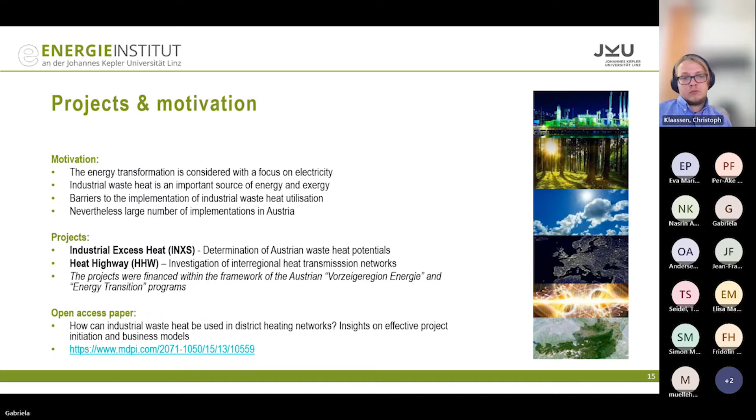So in order to determine the success factors and the business models of industrial waste heat cooperations, we conducted an Austrian-wide survey. In previous research, my colleagues, Moser and Lassacher, searched for already implemented waste heat cooperations and found 45 best practice examples that could later on even be extended to 51. In this figure, you can see the map of Austria in dark gray, and the little black triangles represent already implemented waste heat cooperations. And we can also see that they are especially located in industry-dense areas.

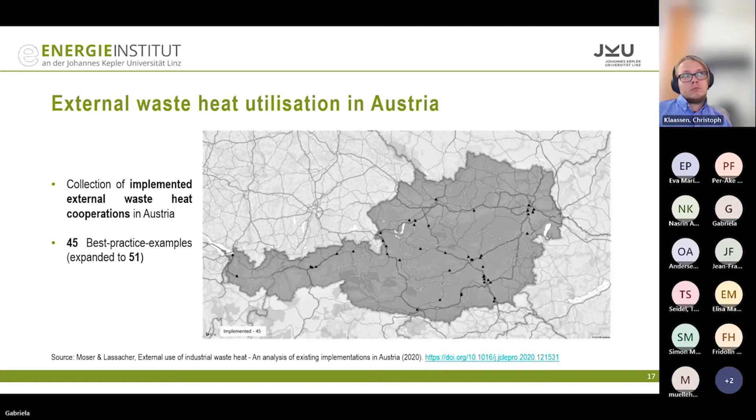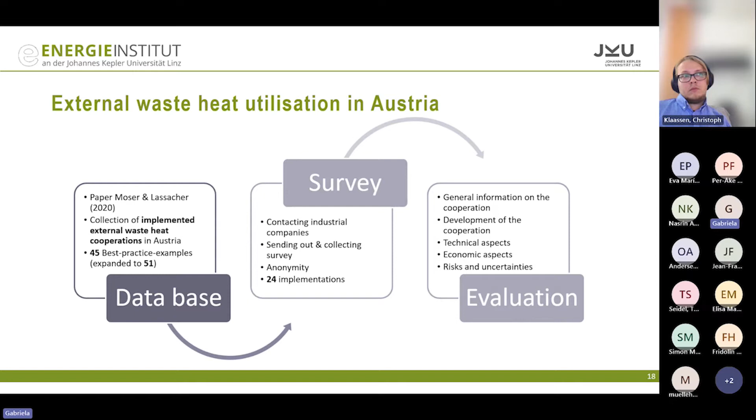Moving on to the survey, we contacted the industrial waste heat providers that were identified in previous research, sent out the survey via mail in the form of a text document, and collected it roughly a month after. We reassured the participants that only the name of the responding company will be published and that further data remains anonymous. In total, we received 24 responses. Then in the next step, we analyzed the survey results on the general information regarding the cooperation, how the cooperation came about, the technical and economic aspects, as well as risks and uncertainties.

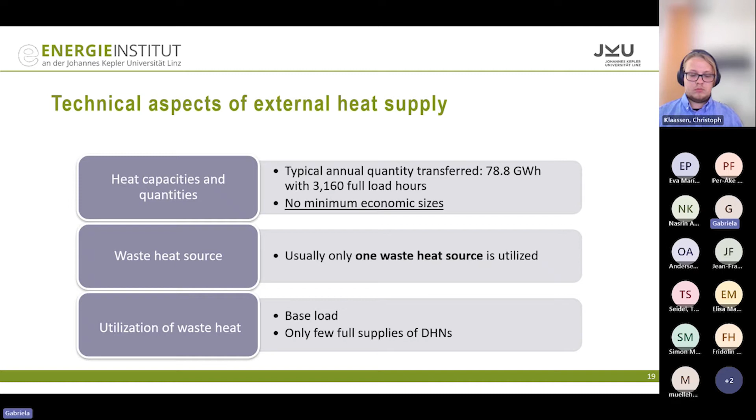So let's have a look at the technical aspects. We found that the typical annual quantity transferred was around 80 gigawatt hours with around 3,160 full load hours. The answers suggest that there are no minimum economic sizes. This stems from the fact that the average capacity was at around 20 megawatts, with, I think, 4 responses indicating that their capacity is 2 megawatts or even lower. Usually only one waste heat source is utilized to cover the base load of the heating network, and only in a few cases has there been a full supply of the district heating network with waste heat.

The waste heat cooperation was mostly initiated by ambitious management or employees of the heat generating company. But of course, this statement is very one-sided as we have not surveyed the district heating operators. And I also want to highlight the role of third parties, like mayors or local councils, as they can be vital in driving such a cooperation forward.

The idea of such cooperations comes mostly from technical and economic factors. For instance, if there has been a new investment, for example in industrial processes or the district heating network, which in turn led to the identification of new heat potential. And around 1/3 come from good contacts on both sides, where there has been a good understanding, regular exchange and a high level of trust.

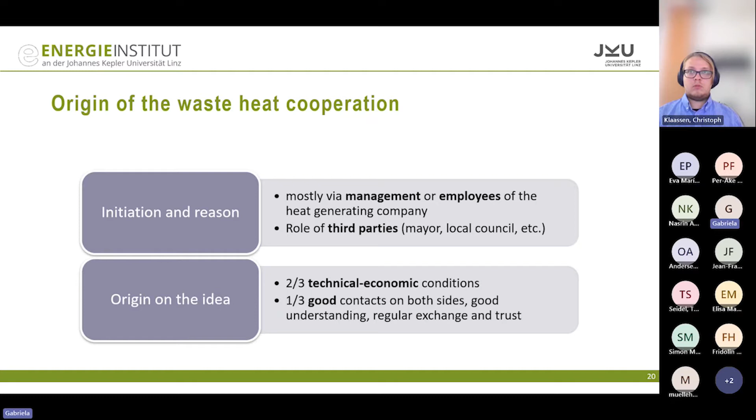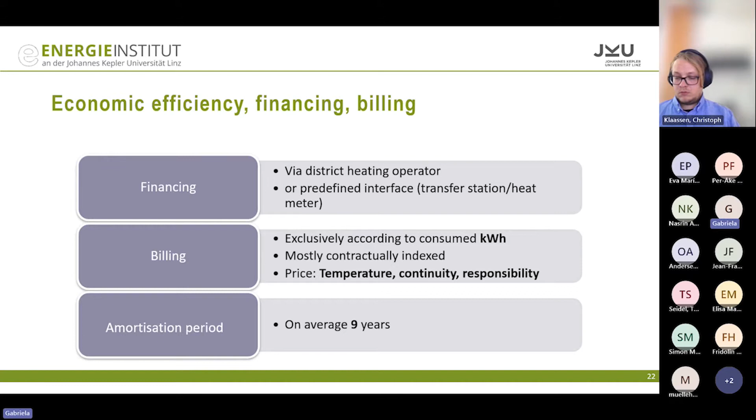Then the waste heat, of course, cannot be free and is heavily dependent on different factors such as temperature, continuity, responsibility. And lastly, we found that the average amortization period is around 9 years. Through the results, we found that there is a standard case where boilers remain in operation at the district heating operator for the case that there are planned or unplanned outages.

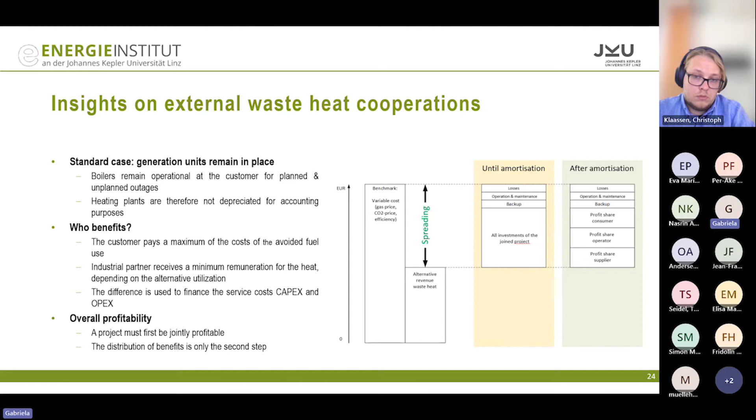The expenses include the CapEx and the OpEx, and compensation for the alternative use of heat. And after all the income and expenses have been considered, as I mentioned before, there is an economic surplus, which is then divided between the two partners.